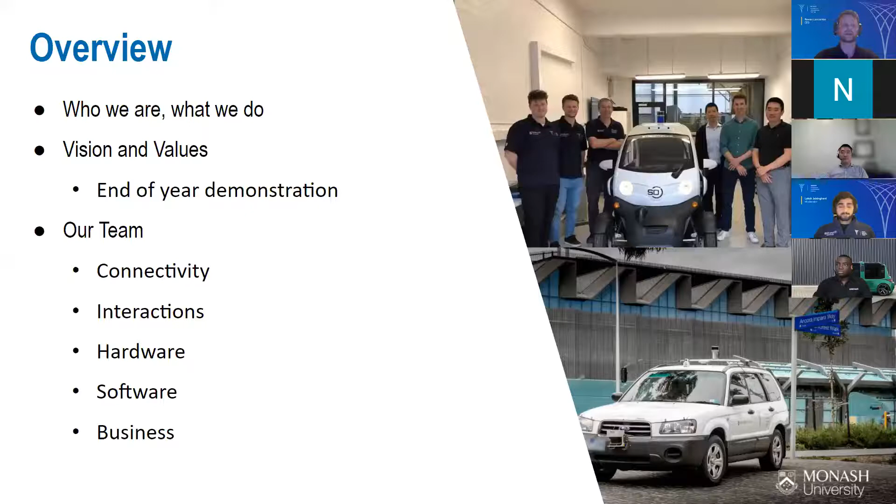Now we'll jump into the safety aspects of our work and how this year we have really focused on this aspect of autonomous vehicles in order to really accelerate our progress.

Before we test any of our software in real life, to ensure a high level of safety, our team performs significant amounts of simulation work. We primarily use Carla, an open source simulator platform, and along with our main software framework, ROS, our development process allows a lot of flexibility in adapting everything.

From simulation so that it can be used in real life when the time comes. The StreetDrone is our primary development vehicle. We use this to test anything in real life. It uses a drive-by-wire system and provides an easily accessible CAN interface so we can directly control its actuation system through software. An extra layer of added safety is that the driver can take control of this vehicle at any stage during testing through manual input.

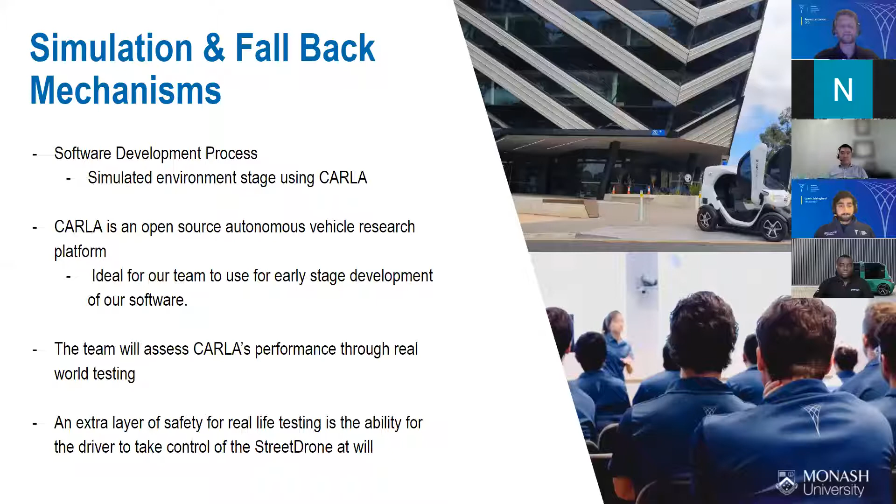This adds an extra fail safe, so if the car starts doing something that we don't want it to, we can stop it from doing that immediately. We have a video for you that shows off our lane keeping simulations in Carla. Once lockdown ends, we plan to test with the StreetDrone, which will allow us to understand how our Carla simulations can be translated into real life and how well Carla can be trusted. I'll just let the video play for a little bit.

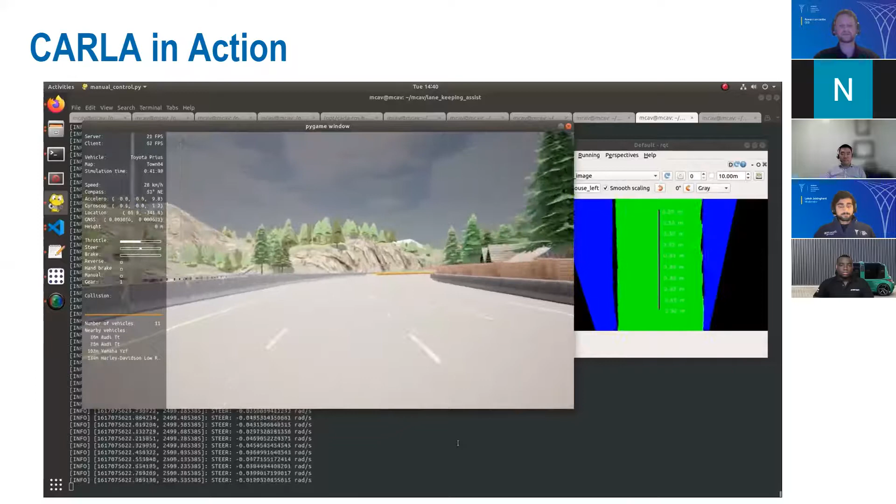Taking a look under the hood, our lane keeping system can be broken down into three main aspects: our machine learning, which is about predicting lanes within an image; image processing, which is used to identify how far from the center of the lane our vehicle is; and finally, the controller, which is used to control the steering output, which can be seen on the screen at the moment.

The hardware team has also been taking a safety-first approach at developing this year. Firstly, our actuators on the Subaru are currently being updated. The prototypes for these were originally installed in late 2019 as a proof of concept, and while they worked very well, they required updating for long-term use for our team. So this year, our team has been working on two actuating projects, the brake actuation as well as the steering actuation. This focus has really been all about safety.

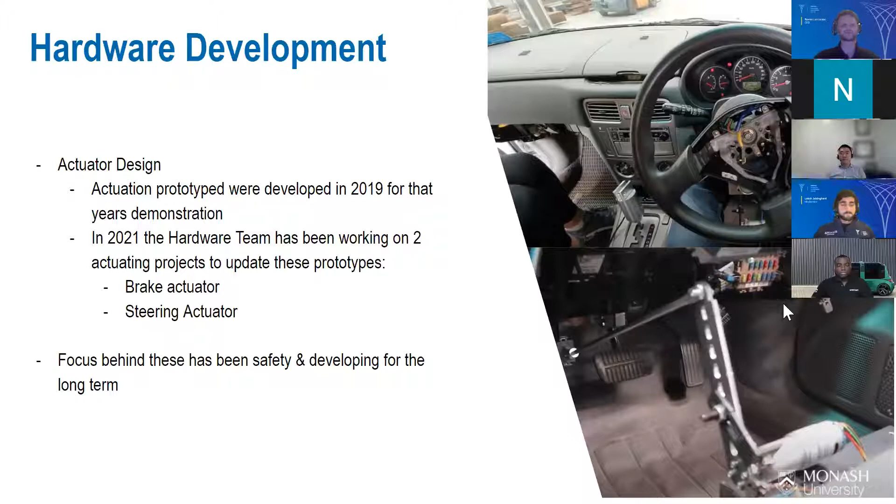The braking actuator being developed this year, as shown in the video on this slide, is far more low profile than the original prototype, making it easier for the driver to sit comfortably and press the brake pedal manually in order to stop the vehicle. The steering actuation is also being designed with safety in mind. The new design focuses on being non-invasive to the vehicle and instead will be built around the wheel so the vehicle structure itself is not compromised.

The motor responsible for providing the drive for the actuator is also spring-loaded, so it can be disengaged by the driver by simply pulling a lever. This added safety feature ensures that the driver is always able to quickly and efficiently take control of the car if they wish to do so. So if the vehicle starts doing something that you don't want it to, simply pull the lever and you have control of the car.

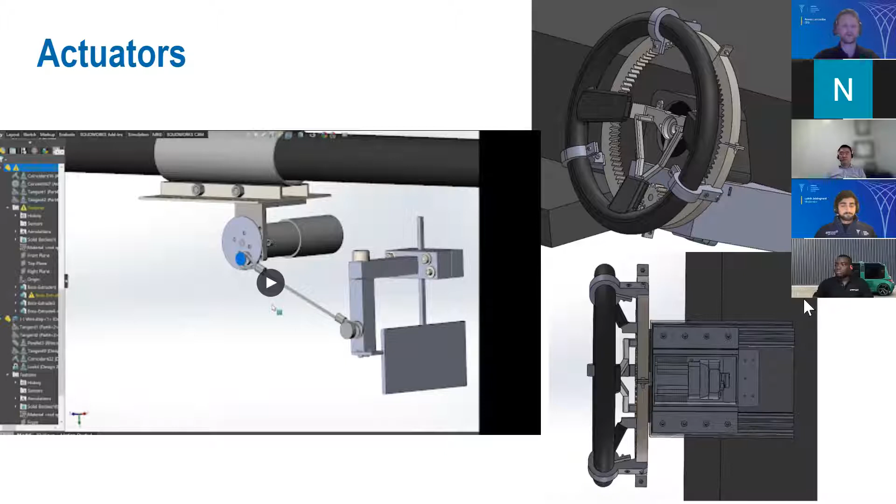Now we shift gear into how our team goes about testing its work. Our team has been working throughout this year on a project that we've dubbed the mini drone, named by our former software lead, Patrick Cleve. The mini drone was conceptualized as a way to introduce our new members to the fundamentals of our work in a low risk environment. An inherent difficulty of working with an autonomous vehicle is our often inability to easily test frequently, which brings the challenge of teaching new members about our existing systems as well as any developments we're making. With this mini drone, we're able to test our software quickly and easily, and it'll be less confronting for any new members than working with a fully sized vehicle.

The development of the project began by focusing on what we dubbed the box. The box is basically the brain of the mini drone. It's the orange box in the image on the right.

This was produced earlier in the year and can be used independently of the chassis for road data collection or benchtop testing such as object detection. The prototype of the mini drone was developed with a second box mounted to a stripped down RC car chassis, as you can see in the image as well.

The prototype uses a Jetson Nano as its main computer and gathers information from an inertial measurement unit, or IMU, alongside cameras and a GPS. This was modeled off the capabilities and information gathered by the StreetDrone. This allows new and existing team members to easily transfer knowledge to the StreetDrone project when working on that as well. The box gives us added flexibility to mount various cameras and LiDAR configurations, which allows us to future-proof any work that we do.

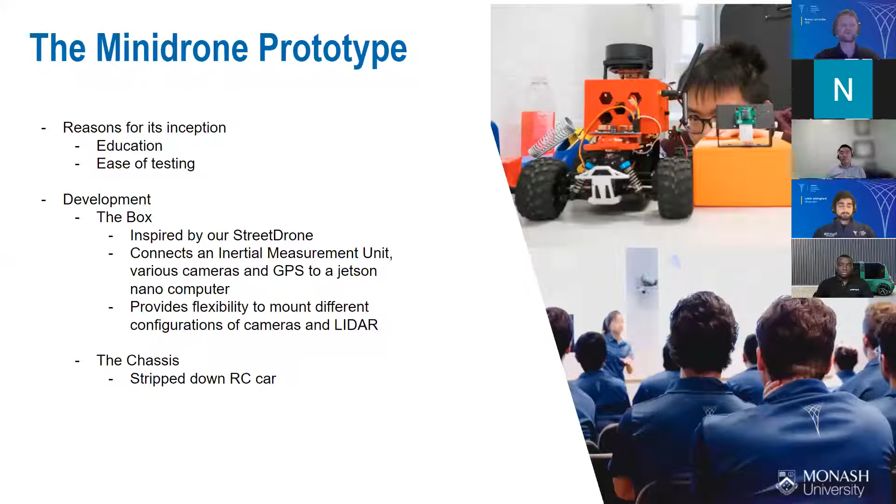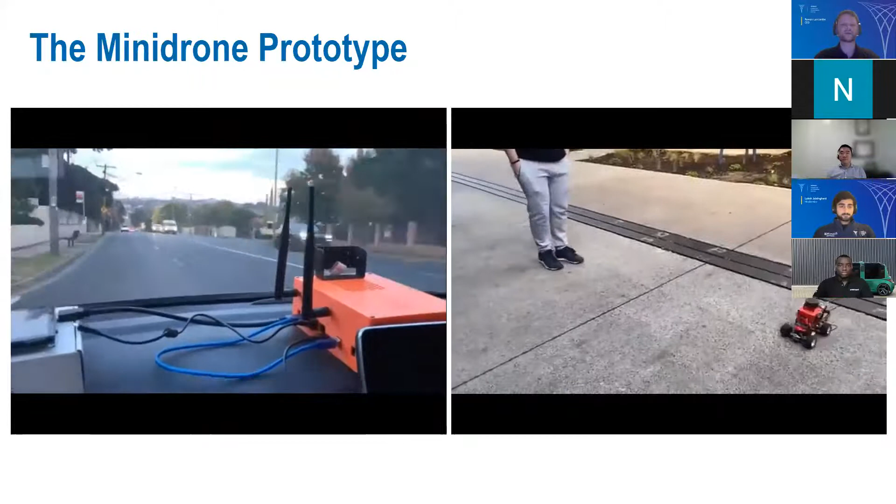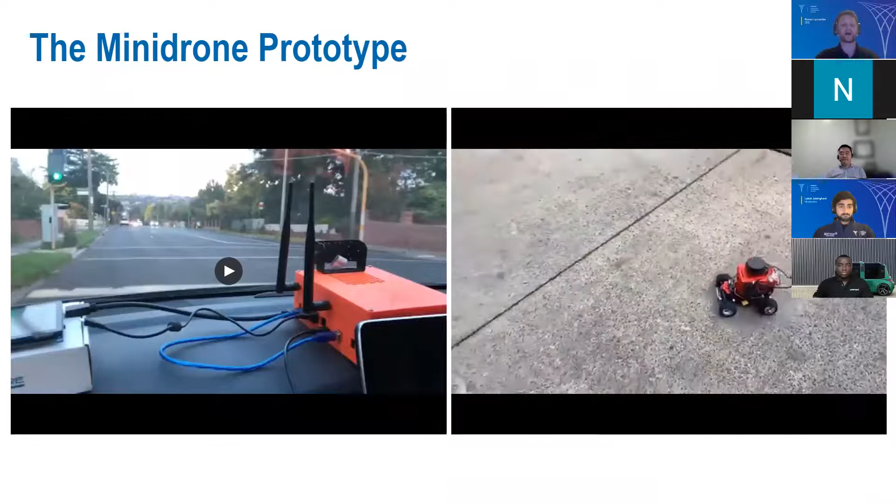Here's a video of the box and the mini drone prototype in action. On the left, we can see the box sitting on top of the dash on a regular vehicle, collecting sensor information. We can even go further than this, and even in testing, test our visual algorithms in real time. On the right, we have an example of the mini drone being used to detect obstacles and apply an emergency braking system. We were able to develop features like these on a small scale and upscale them to full-size vehicles like the StreetDrone due to the compatibility of our software.

While only demonstrating two cases here, we feel that this project has large potential, not only in developing our members' understanding of autonomous vehicles, but also in helping to bridge the gap between testing and the self-driving space.

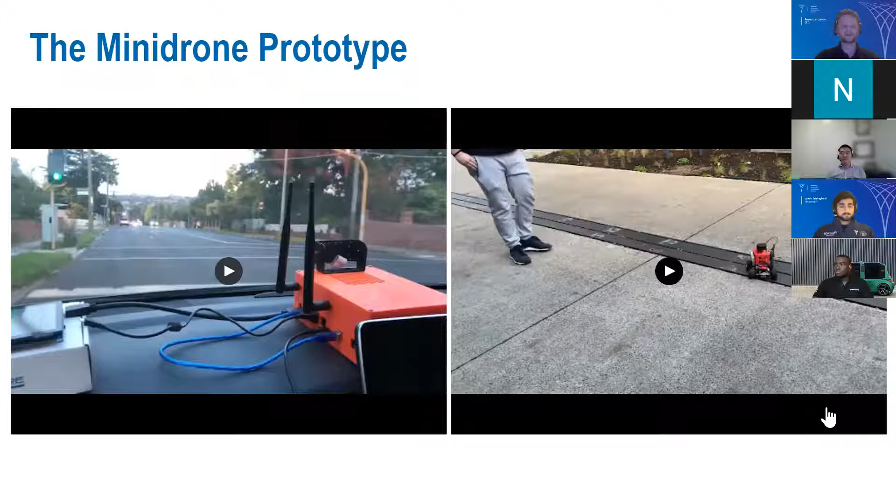Our hardware team is also working to develop the Mark 1 mini drone. This draws inspiration in appearance, at least, from the Tesla Cybertruck. This vehicle will take all of our team's learnings from the prototype and combine them into one vehicle.

We have purposely made this project open source, in order to give anyone interested the ability to build their own mini drone, so they too can learn about autonomous vehicles in a safe environment. The Mark 1 will also be built from the ground up by our team and is currently being prototyped at the moment. It really displays all of our team's hard work over the last year and a half.

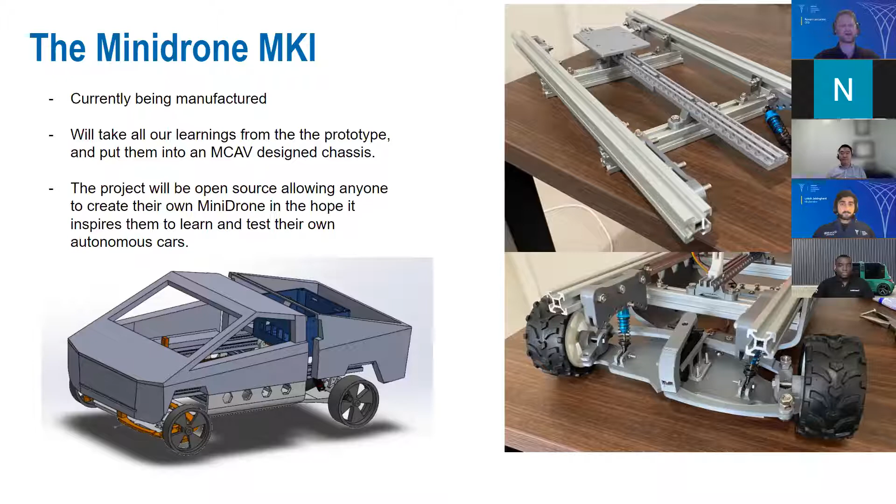The final stage of our testing for our software is the StreetDrone. This is a converted Renault Twizy with autonomous actuation pre-installed. It's basically the mini drone's very big brother, so to speak.

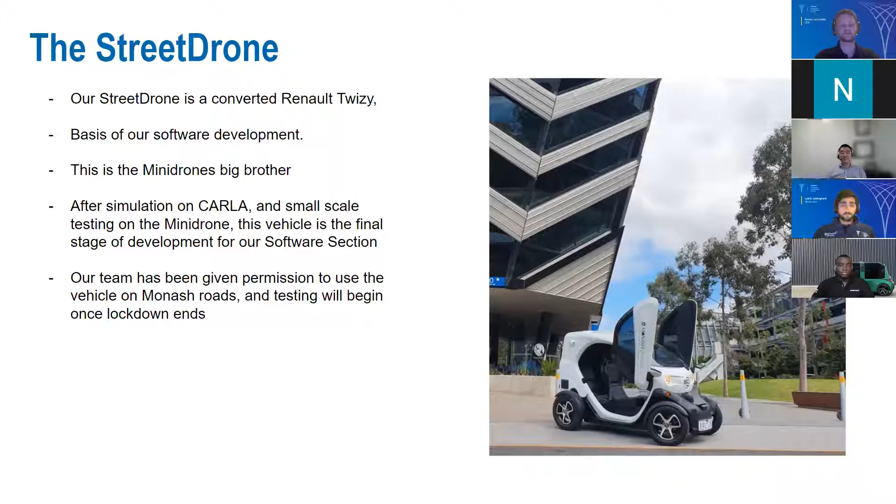Our team has been approved to use this vehicle on Monash's local roads, and testing will begin once lockdown ends.

Finally, we'd like to talk about adoption and how we are working to get our systems out into the real world. Our end of year demonstration, which at this rate will hopefully happen over the summer break, focuses on bringing all of our work together.

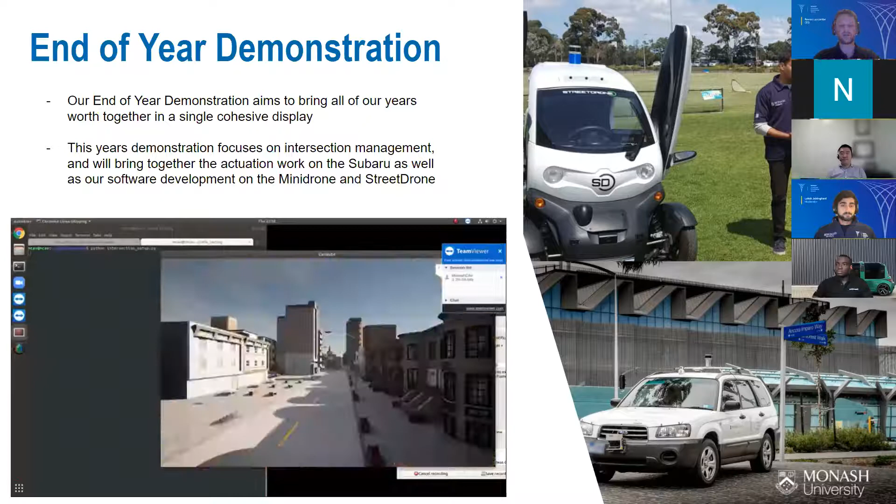We'll be able to bring both our Subaru and StreetDrone into the same intersection and successfully navigate the area safely and effectively. A mini drone will also be involved as a third vehicle, as well as our dynamic obstacle project, which will simulate a person crossing the road, as you can see in the simulation above. We'll also be looking forward to this display over the summer, and we'll give you all updates on location and time of when this will occur.

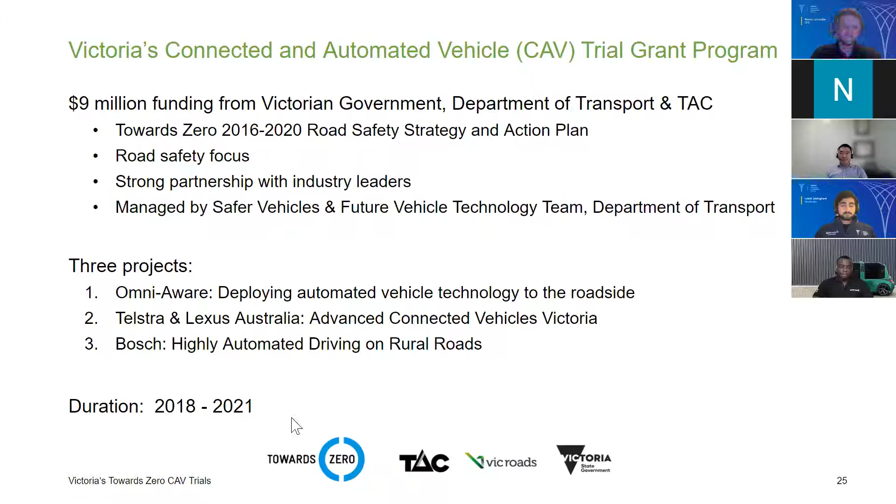The first one is the Omni-Aware project, which I call the infrastructure project. Omni-Aware is essentially a consortium of transport expert organizations, which the Department of Transport had partnered with.

The idea of the project is really to develop and adapt perception technologies that are derived from automated vehicles to the roadside use, in order for us to predict crashes and near misses using LiDARs. Multiple LiDARs and cameras were installed at a particular intersection in Yarraville, where we built a continuous spatial awareness of pedestrians, cyclists, cars, buses, and trucks. Essentially, using the technology from the smartest AV and making the smartest roads and improving safety. So that was really the idea.

The key focus is to enable the benefits of AV technology for all road users sooner by exploring their application on the infrastructure. We were able to apply the cooperative intelligent transport system through the connectivity portal for us to inform other road users of potential hazards. So it's really using the technology to detect the hazard and then be able to communicate that.

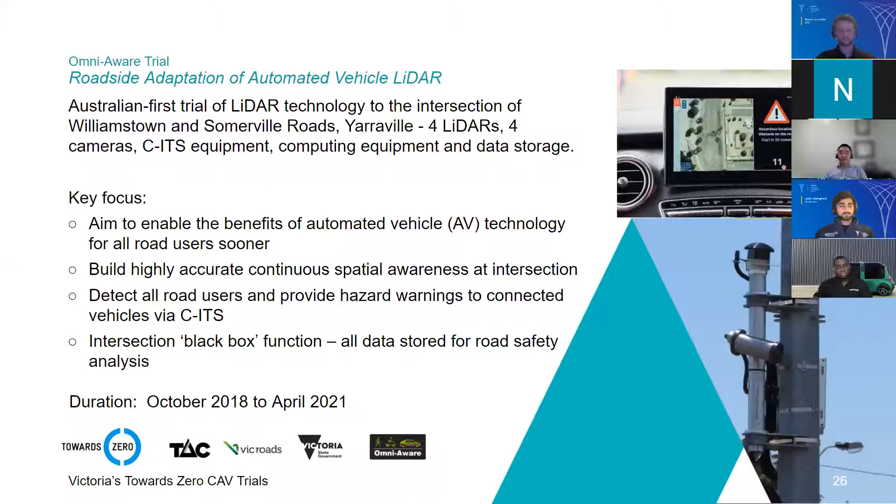Just to give you an idea, this is really a snapshot of what the LiDARs can pick up. After quite a bit of off-road testing, this site in Yarraville became operational in November 2019. The aim here is really to detect the crashes and near misses in real time and then be able to send these warning messages to connected vehicles in the future.

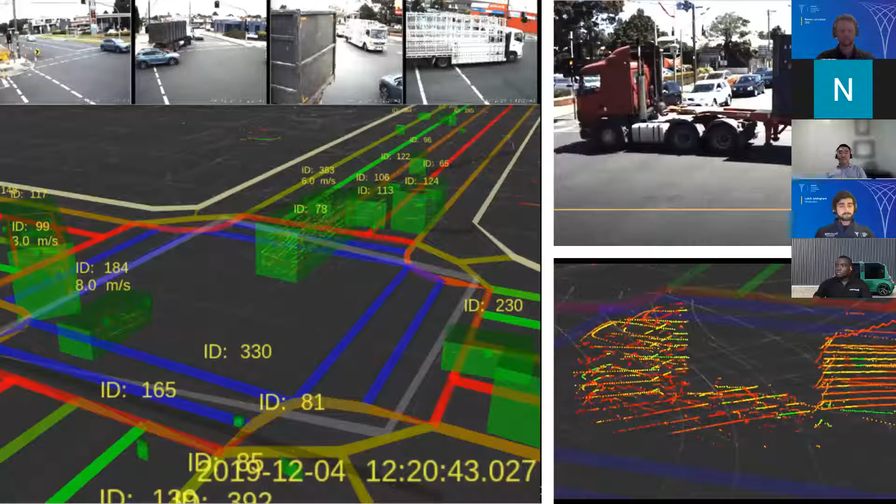Just to give you a better idea, I'll run through this video. It's a bit of background as well in terms of why we selected the intersection, because we know that over a third of lives lost on our roads are occurring at the intersection, and about 44% of serious injuries occur at intersections in Victoria.

In this example, you can see how the raw data from the 4 LiDARs are being merged into this object identification and classification process. The data is then processed and fused in real time, and it allows it to also record the accurate position, direction, speed, and acceleration of each of these road users at the intersection.

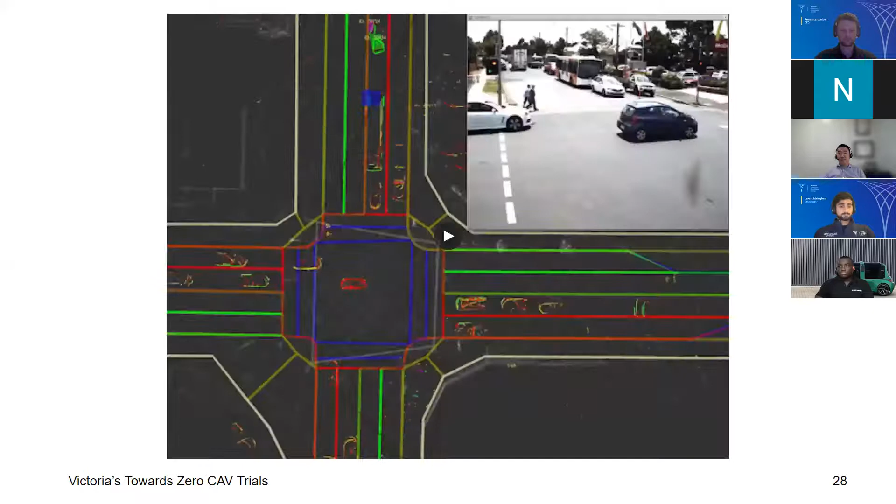Okay, next slide. Just a real quick summary in terms of what the findings were. We managed to see that there is a lot of potential with LiDARs. We found that it had a very strong spatial accuracy up to within 10 centimeters, and the high fidelity point cloud was collected as well through this LiDAR.

The hazard identification was also very rapid. It can detect any hazards at less than 0.2 of a second. So you can see that there is a huge potential there for us to do that in the future. The LiDARs provided a full 360-degree view, and their performance, unlike cameras, was not degraded by environmental conditions like wind and rain. We're also able to confirm the communication through CITS warning functions with the Q-Free equipment that we used at the trial.

I won't go into detail, but essentially those were some of the key learnings.

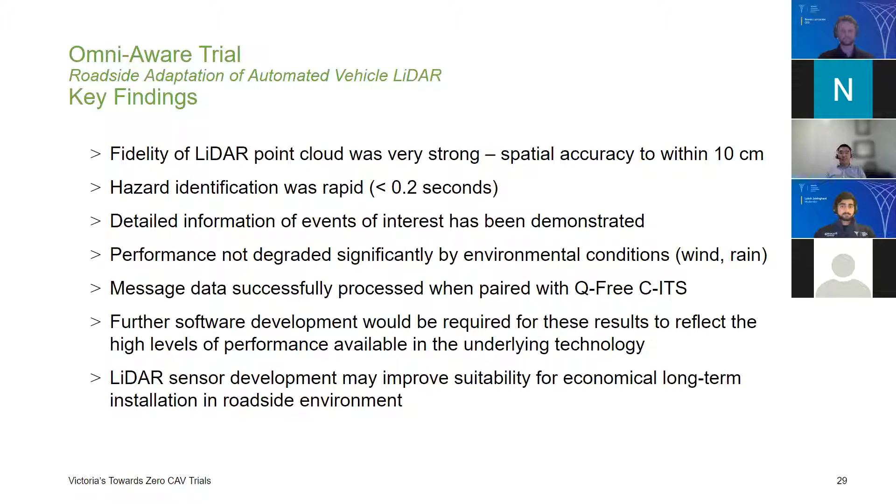The second trial I'd like to talk about, and this is also something I'll be presenting at the Australasian Road Safety Conference in a bit more detail. So if you're interested, that's going to be presented next week. I can send you some information there if you're interested after this presentation.

The trial involves our partners, Telstra and Lexus, in developing a communication protocol using cellular network or CV2X, cellular to everything technology. It allows vehicles to communicate directly between themselves, and also allows vehicles to communicate with a lot of our infrastructure, such as our speed signs, roadworks, as well as variable speed limits that we currently produce. So the vehicles can ingest a lot of the information and provide some of the safety warnings to other road users in the effort to help with safety outcomes.

The key focus, I guess, is to contribute to the Victorian knowledge base as to why we're doing this. Our knowledge base around connected vehicles, it's important that we have that, and the potential of the road safety benefits in future scenarios, because there are a number of different use cases that we have tried in this trial that can produce some safety outcomes for us in the future.

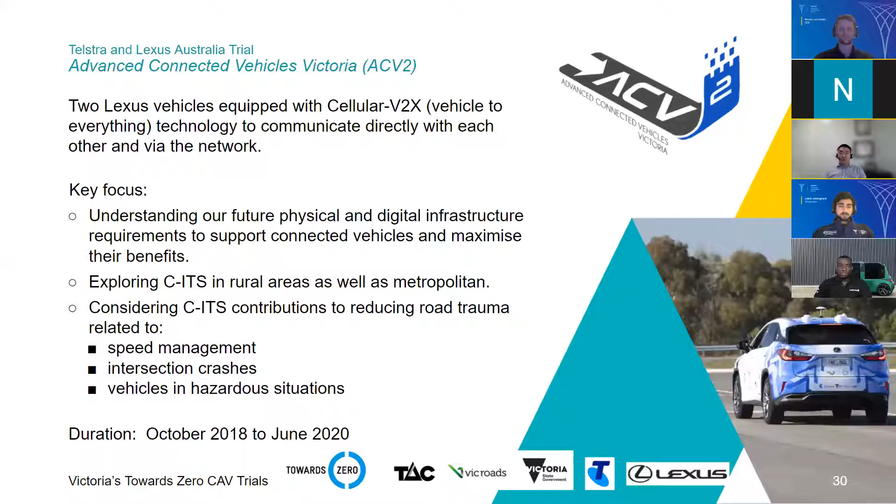In this trial, an enhanced version of the Telstra 4G network was used to develop a vehicle connectivity ecosystem. This is where the Telstra hosted cloud ingested data from the department and other sources and was able to communicate messages to the vehicles where relevant.

Next slide, please. In terms of summary of the use cases, you can see here there were 6 use cases trialed, and a lot of these are typically referred to as day 1 CITS use cases. They're pretty standard, and research by Austroads and more recently by ITS Australia has indicated that a lot of these use cases can provide significant road safety benefits to Australia, some up to between 30 to 50% reduction in crashes estimated if the technology was widely deployed.

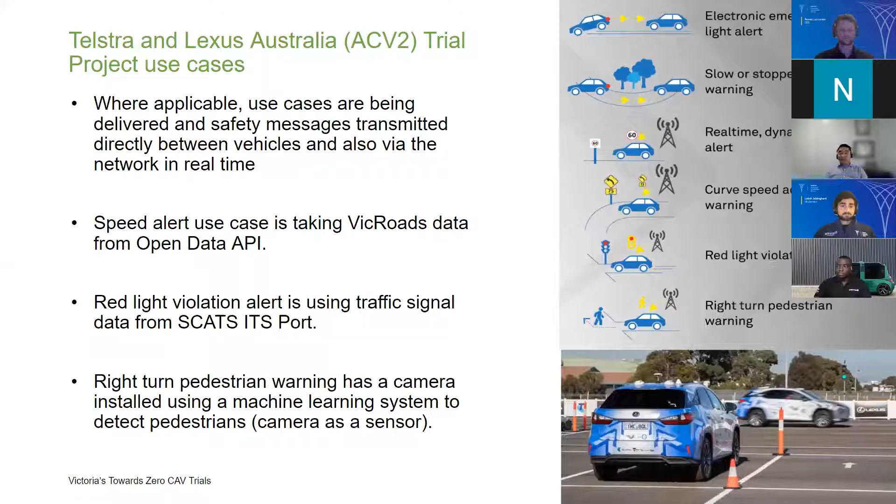I'll just take you through one example in a bit of detail, which is the electronic emergency brake light use case, which is when the sudden braking of a vehicle ahead is received by the following vehicles as a warning alert. The benefit of this technology is that it doesn't require a line of sight.

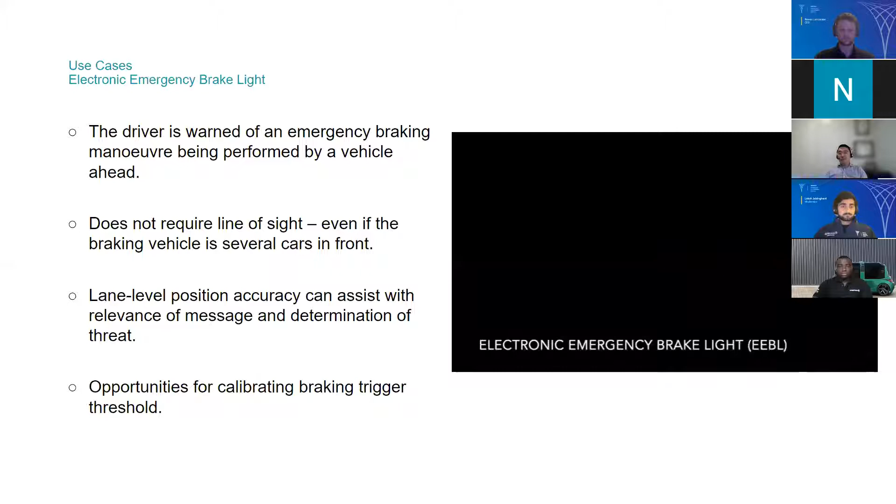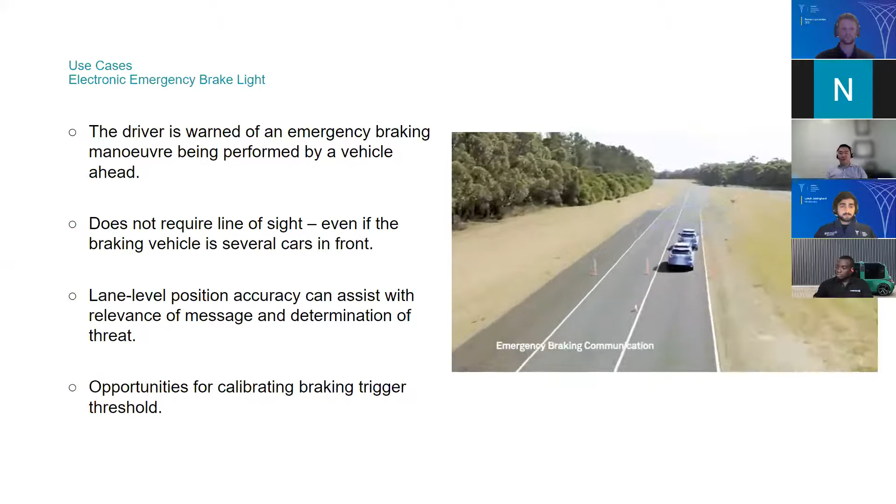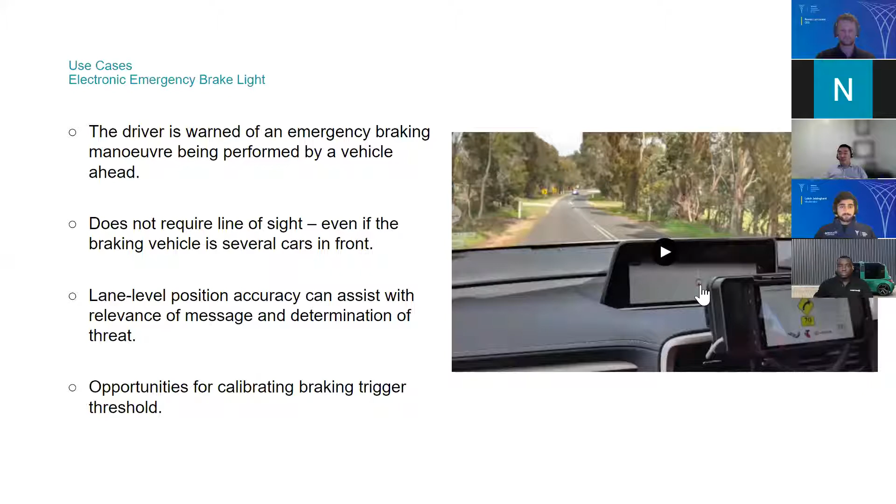So even if the vehicle ahead is obstructed by a truck or any other vehicles, a warning can still be sent, and this allows drivers who may be inattentive or may have their vision obscured to receive this warning message and take evasive action as quickly as possible. The warning could be provided in around 0.1 of a second, which is minimal addition to the reaction time of a human, and this could be the difference in helping the driver avoid the collision altogether.

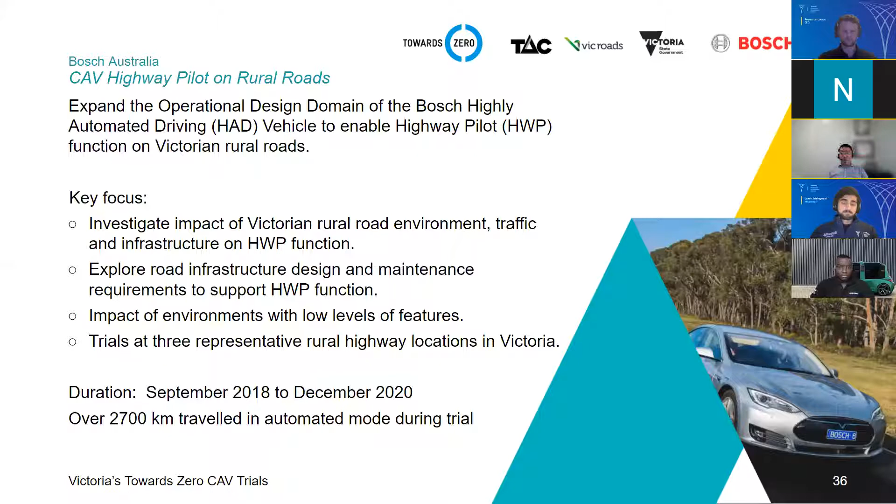We managed to cover over 14,000 kilometers during the development, where 2,700 kilometers were conducted in automated driving mode. Next slide.

Like I said, the involvement with Bosch was quite unique, and we were a little bit fortunate as well - they were based in Australia, in Melbourne, and we've had this long-standing relationship even back in 2015, 2016, when we trialed with Bosch in a less complicated scenario, a low-speed semi-urban environment at Albert Park. That was part of the ITS World Congress, and since then the team has developed the system further to enable its operation on higher speed motorways in 2018.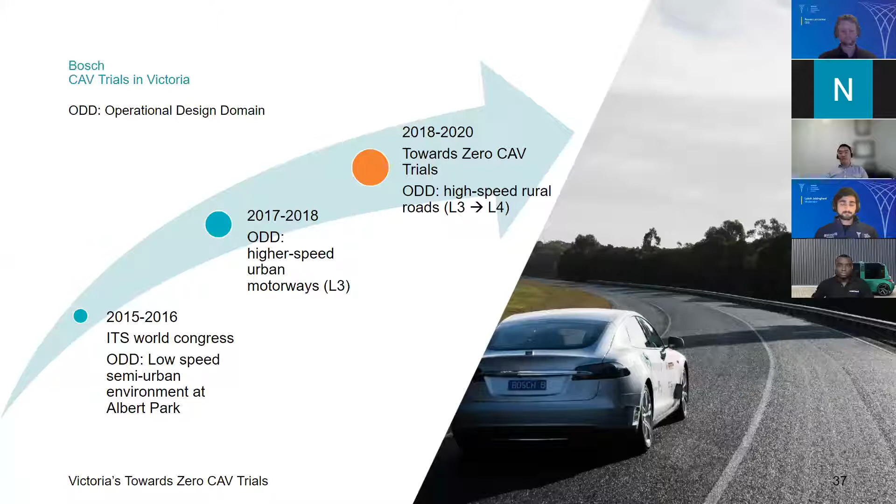And more recently in this trial, we had the team essentially overhaul the entire vehicle, rebuilt it with new LiDARs, new sensors, new radars, and rehash it to a point that it became level 3 plus automation. So that's really the journey that we've had with Bosch. Next slide.

In terms of key findings, we've acknowledged there is a need for strong and continued collaboration between industry and government agencies to facilitate automated driving technology in Australia - it's really an effort required from both sides. We've seen from the Bosch trial that high definition mapping is a critical component to ensure there are standards going forward. I think that's a key step in addressing some of the challenges we've seen.

There are currently no standards for high definition maps, or readily available HD maps, for Victorian roads, so somebody actually has to go and source that information. In this case, there was another Tesla vehicle used for mapping purposes, and the other vehicle you saw before was the automated vehicle used for automated driving.

And I guess the other lessons learned were that regional roads have a relative scarcity of roadside features, which is important for vehicles to be able to use to detect and localize their positioning.

And that's very, very critical in order to localize itself accurately. And also what we've seen is that the radar landmark-based localization was able to be compensated in situations where inputs of camera-based landmarks and differential sat-nav were degraded or unavailable. So you've got to have some redundancy in the system to enable technologies like this to work.

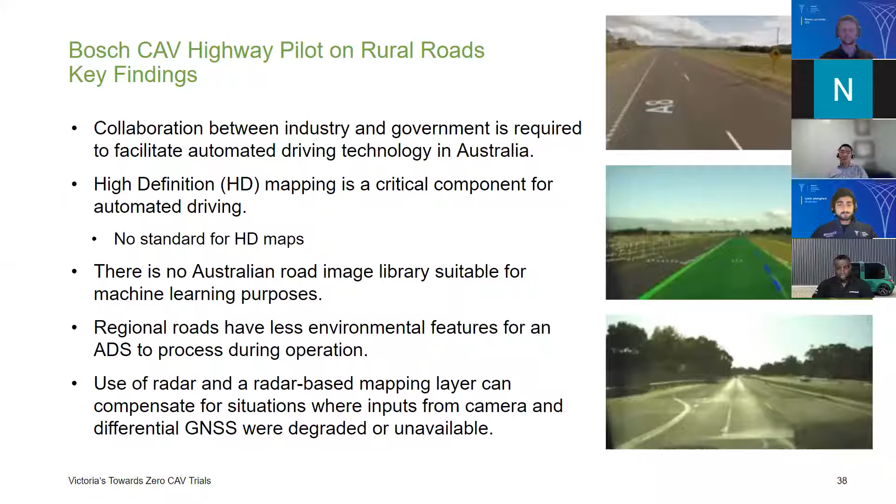Next slide. Yeah, so this slide really just highlights the other work that we've been doing, which is to establish a regulatory framework, which we know is very critical in signaling to the community as well as the industry that automated vehicles are being trialed in a safe and managed way. So back in 2017, legislation was passed in Victoria to allow us to trial highly automated vehicles successfully and safely.

So the automated driving system permit scheme is now active, and we've had a number of permits issued. That obviously only applies if the vehicle is capable of driving at level 3 and above. In this case, Bosch was the first recipient of the ADS permit in Australia, and we've also had the Monash Twizy, that you mentioned earlier, which has also been issued a permit to operate.

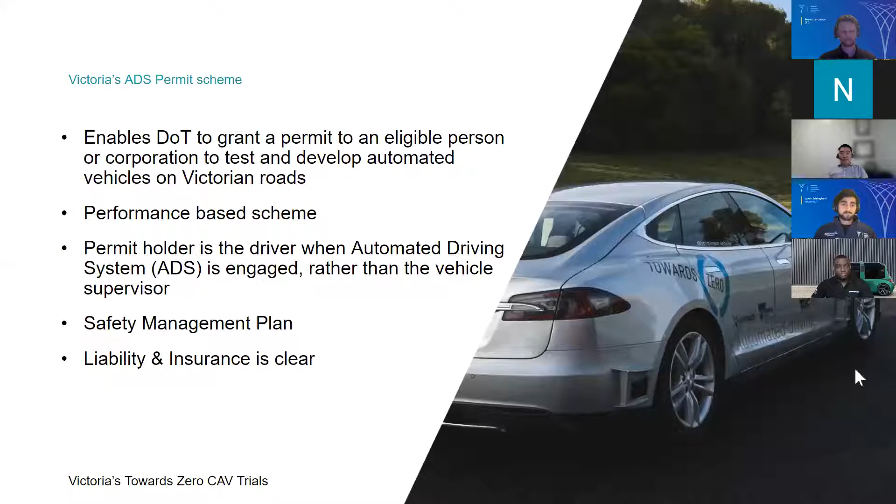Next slide, I think that could be the last. Yeah, so that essentially concludes my presentation. Hopefully that was helpful for you all to take away, and also highlights some of the work that we've been doing in Victoria. Happy to take questions at the end, but if you have any other questions I may not be able to answer today, just feel free to reach out to me with that email there.

And again, if you are interested in knowing a bit more about the 3 trials that I mentioned today, my team and myself will be presenting at the Australasian Road Safety Conference next week. There is a link there if you're interested in registering.

Thank you. Thank you so much, James. To be honest, I think I have taken 2 really important key points from your talk.

Firstly, as a student of robotics, I find it really interesting that whenever I want to learn something new about robotics, I move more towards, let's say, mobile vehicles or mobile robotics, including drones or cars. But no one really thinks about using the same technologies and sensors like LiDARs and cameras for something that basically goes under the radar, like the Omniaware trial that you talked about. That was really interesting to see the same key principles of robotics, like image stitching and clustering, being used for something.

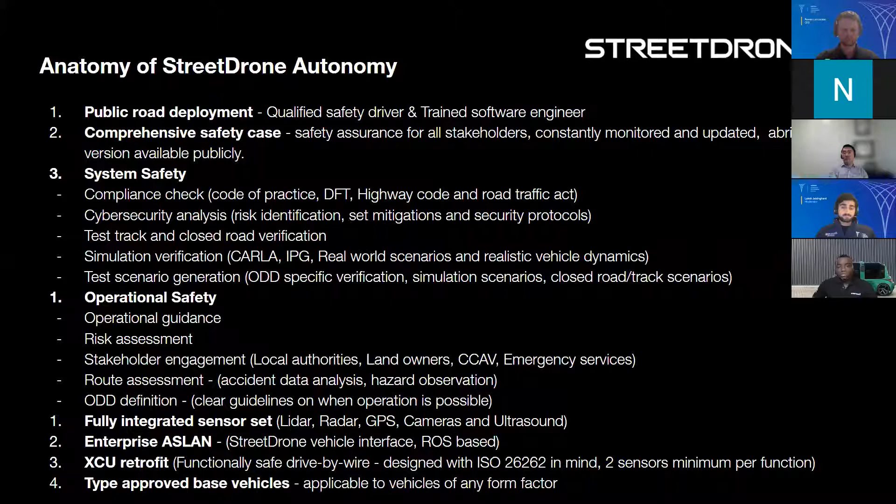The XCU retrofits - we can fit any of those, the drive-by-wire, into any vehicles, and there are about 2 sensors minimum per function. For your steering, for example, we have 2 sensors, 2 ECUs - one taking a sort of monitor control and the other taking a master control. And then the type-approved base vehicles, so any vehicle form factor. Next slide, please.

The recent project we're doing is this Terberg tractor - we've taken a Terberg electric tractor or truck, a 40-ton HGV vehicle. This is a government-funded project which is allowing us to prove our technology on a big scale. Some of the guys supporting this project are big players in the game - Nissan, for example, Vantec. Vantec is a huge logistics organization that supports Nissan, and they're owned by Hitachi. It's really interesting what we do there.

Terberg are helping us with the retrofit of the vehicle. The partnership we have with Terberg allows us to understand a bit more about their vehicle, because yes, we can fit any vehicle, but we also need to have an OEM relationship to help us understand how the vehicle actually operates.

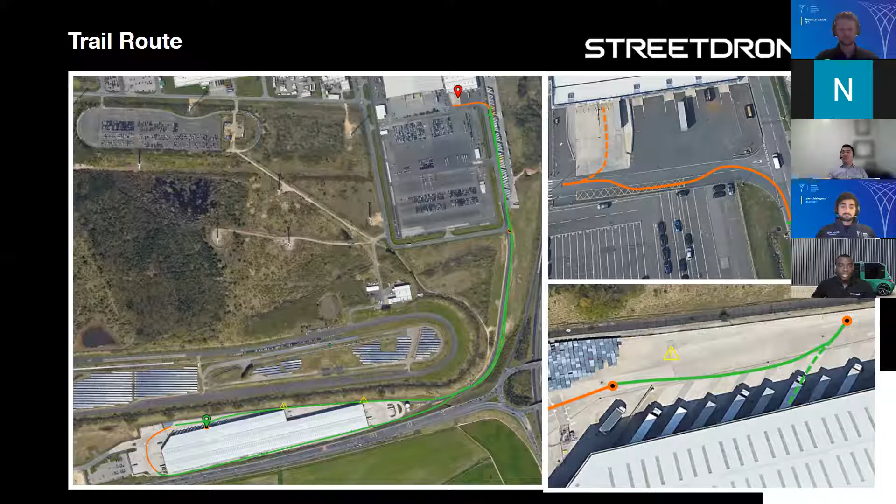This project is basically - sorry, next slide, I'll talk about that bit in a second. This project is about a trial route. It's quite a simple trial route, but it's also very complex when you're doing autonomy - nothing is really simple. What we're doing is moving parts for Vantec from one part of the Nissan factory to another. That's the location, and that's the drop-off point for Nissan - that's the Vantec building there. Next slide, please.

I'm just aware of time, but you guys can absolutely get in touch if you have any questions. We started this project at the beginning of this year - sorry, that's wrong, we started this project about 3 months ago actually, but we've done a lot, so it feels like it's been the beginning of this year.

We started with a test mule, and that test mule is the Nissan eNV200, which basically replicates everything we're going to fit on the truck. So the Nissan test mule is an easier vehicle for us to retrofit and understand what it looks like on a Terberg truck, because for a government-funded project, you only get one vehicle in terms of budget, so you want to make sure everything is right because it's the first time doing it.

And as you can see there, we've been at Nissan conducting some of the works. We've been at Vantec next door, and we're also using IPG simulation there. So we've done some vehicle in the loop testing simulation that allows us to spoof the vehicle in real life. It reacts in simulation the same way we're expecting it to react in real life.

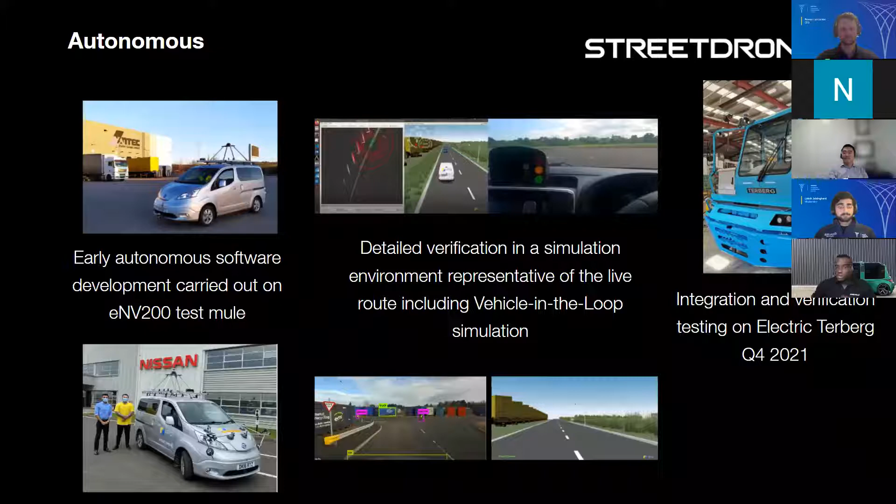Thank you very much, guys. In terms of the truck, we're expecting to deliver that project at the end of March in 2022, and I'm sure Nick will probably get in touch with me about some of the information, and I'm happy to share that with you guys. But yeah, if you have any questions, please get in touch.